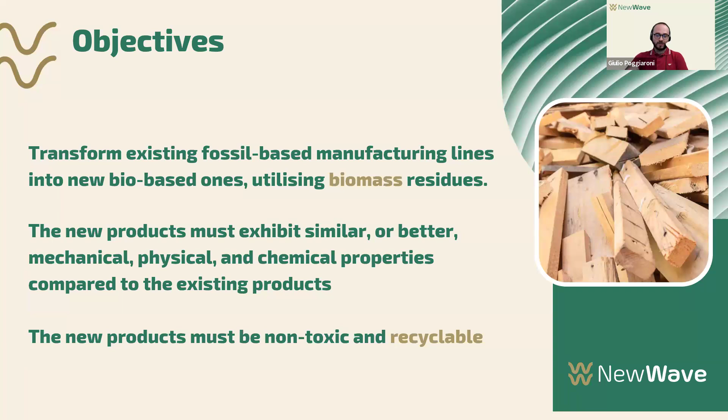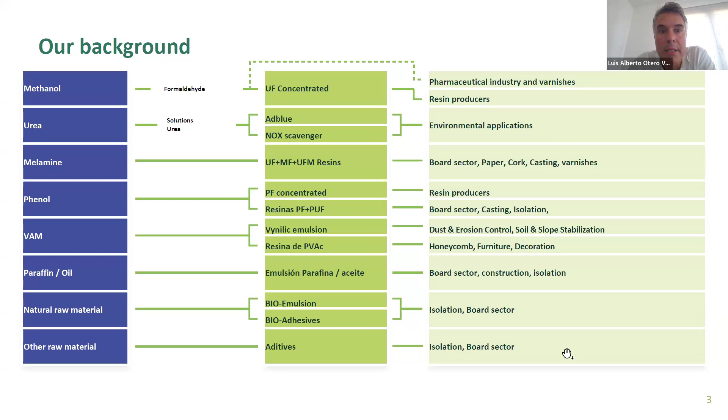Regarding this research on bio-based products, in the last 15 years, as I said before, we carried out several European projects, but also internal projects, from biomass or agro-waste to extract the polyphenolic compounds, lignin and tannins mainly. And when we arrive at a solution or a product, we file the patent and register the trademark name.

In the next part of the presentation, I will explain the technical challenges and the sustainability issues in the engineered wood sector, and we will focus on MDF as an example, but it's quite similar for OSB, particle board, and plywood. Any additional questions after the presentation, we may answer. Okay, next, please.

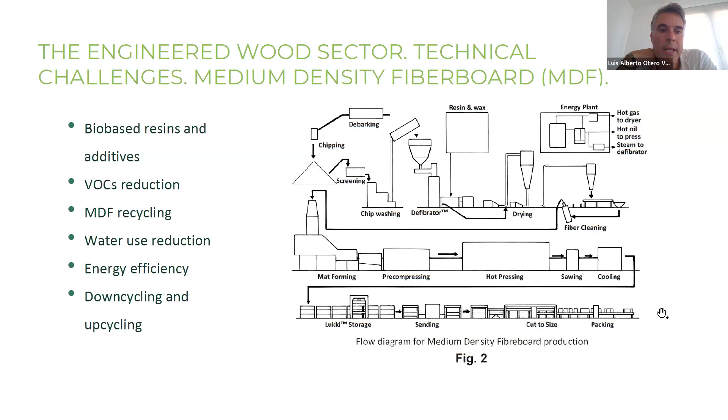Regarding sustainability, the challenges are not different from other sectors. One of the challenges is decarbonization. In FORESA Technologies, over 60% of our projects are dealing with decarbonization and reducing the carbon footprint of our processes and products, and also trying to push forward our raw materials to reduce the carbon footprint. Another topic is water reduction and energy efficiency, as I said before.

Another important thing is to create processes and products safe and sustainable by design. In this case, FORESA Technologies has integrated regulatory affairs in our area. So just before starting a project, REACH issues and sustainability and safety topics are very much in mind. This is important because from the very beginning, we take these issues into account.

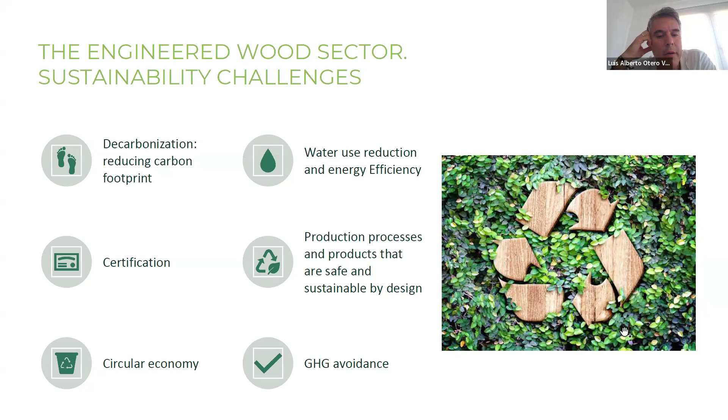Circularity is also important because we need to move from a linear economy to a circular economy, and we have this point in mind in each new project. And of course, the NewWave project also fits perfectly with this topic. And greenhouse gas emissions: we need to avoid or carry out abatement of these gases, for instance CO2, but also other organic molecules. Next, please.

For us, NewWave is absolutely aligned with our goals and objectives. And in this case, our work is focusing on work package 5, and we'll explain a little bit our work in this nice project. Next, please.

Okay, the idea of the project is to use residual biomass to create several streams and to add value to these streams using a fast pyrolysis technology. In this case, FORESA will use the bio oil that comes from this fast pyrolysis, and we will use these fractions in our products and to develop new products to substitute the oil-based raw materials. Okay, next, please.

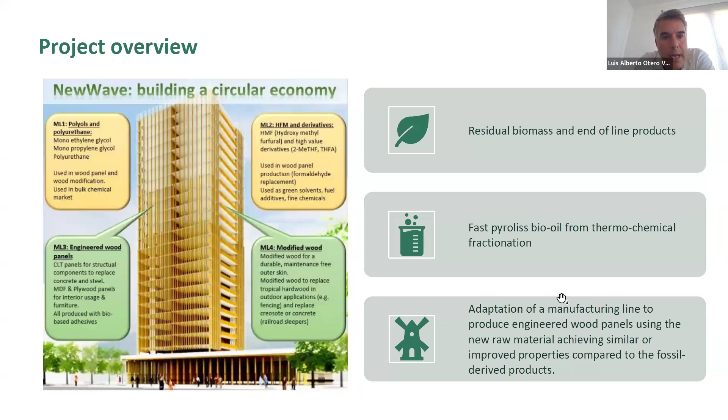In this case, we will use the lignin fraction, several fractions with different characteristics: molecular weight, aspect, pH, and so on. So we will analyze these lignins. We will produce resins different for each application. It's not the same resin for plywood as a resin for MDF. And once we have this resin, we need to adjust the manufacturing of the composite. Plywood is not the same as MDF, and plywood with lignin fraction A is not the same as with lignin fraction B.

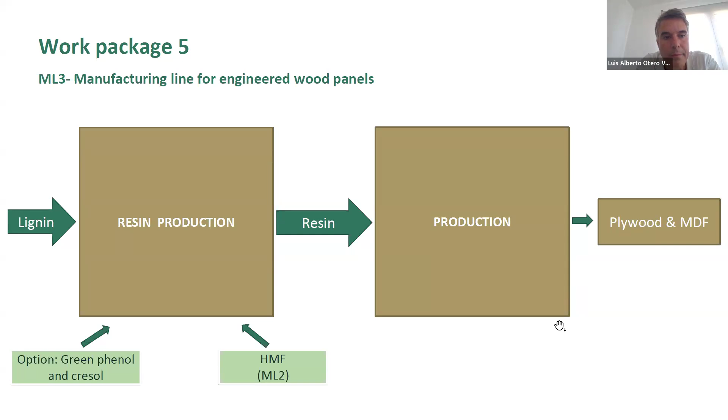Another goal in this project is to obtain a fully bio-based solution using green phenol and cresol obtained by RUG, and also to use hydroxymethyl furfural for a 100% bio-based resin. Because in the case of lignin, we are trying to increase the substitution of fossil phenol by lignin, but we also have a non-bio-based fraction that comes from formaldehyde. So the idea of the fully bio-based solution is to substitute formaldehyde with another bio-based aldehyde, in this case hydroxymethyl furfural. Okay, next, please.

Okay, the duration of the project is 3.5 years. And this is the chronogram with the activities, and the final objective is, as I said before, to produce a 100% bio-based resin. Okay, next, please.

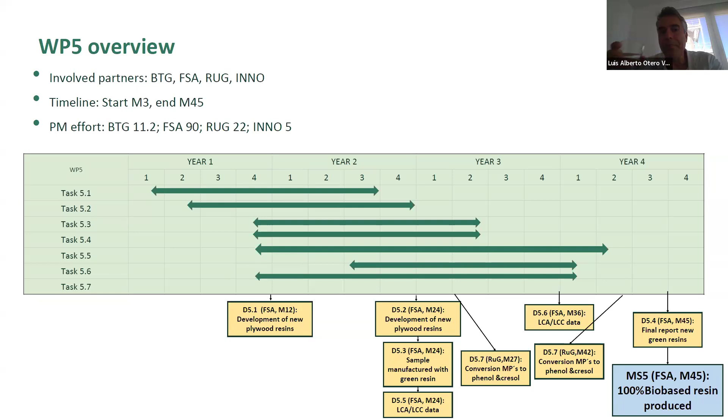The objectives of this work package are to design green panel boards, plywood, and MDF based on this pyrolytic lignin. The idea is to use the highest content of modified lignin as we can. And in a second stage, the idea is to develop a fully bio-based plywood and MDF using this biophenol and biocresol, and also the HMF.

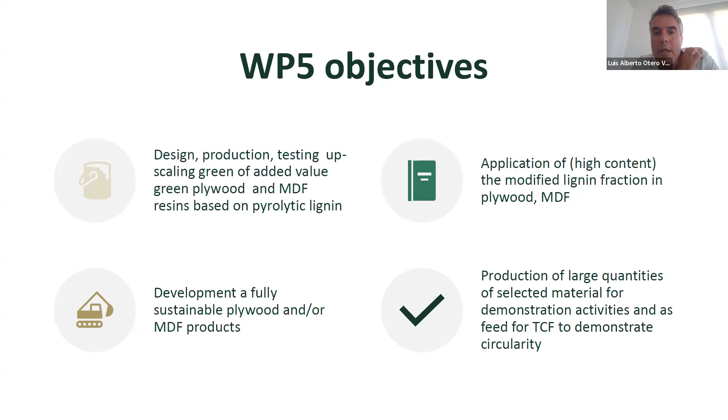And the idea is to produce enough amount to test the possibilities of this technology, to carry out the scale up of these products. Next, please.

So more or less the tasks are: we carry out the characterization of the lignin fractions from BTG. In this case, we analyze the CHNS, the molecular weight, the pH, viscosity if the product is liquid, and physicochemical characterization. The next step is to see the suitability of each lignin to use in phenolic resins to substitute the phenol for lignin, to try to change the amounts or the degree of substitution of this phenol, and also to design new resins to overcome the problems we have when we characterize the resin.

After that, we scale up and we cook these resins in two streams: one resins for plywood and another type of resins for MDF. And finally, once we have the resin, we need to adjust the conditions of the line to produce the panels. The conditions are press temperature, pressure, cycle press, etc.

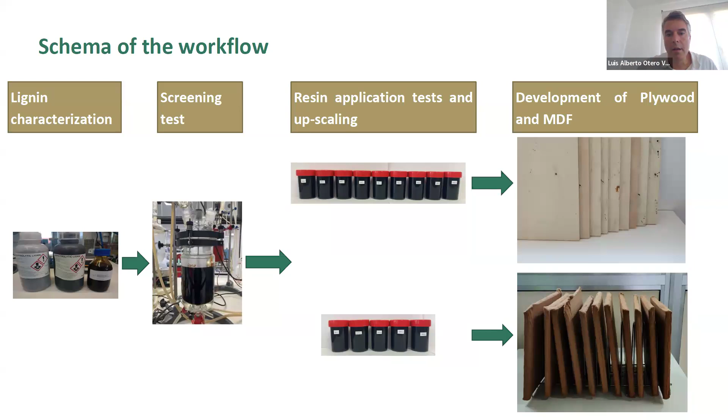Once we have the resins, we analyze them. It's also important, the physicochemical characterization, but one of the main parameters is the reactivity. We measure the hardening time, also the free formaldehyde of the resin, and the free phenol. Additionally, we analyze the molecular weight distribution. In this case, not only the average molecular weight. For us, it's really important to see the graphic, the distribution of the different molecular weights, because it has a relationship with the properties like cold tack, reactivity, and behavior in the process of manufacturing the composite.

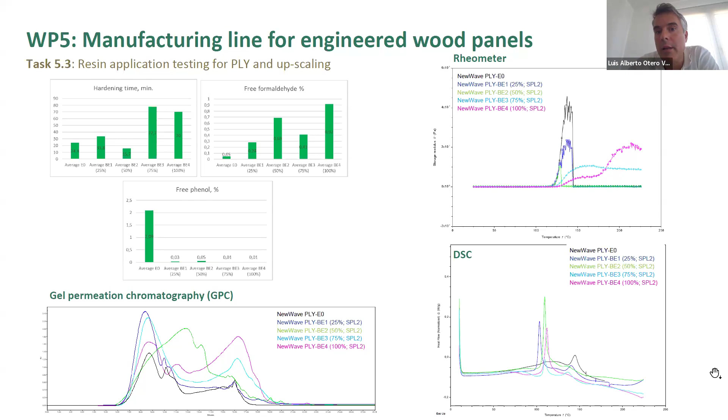It's important also to carry out a rheometer test, that means mechanical curing. We have a rheometer using disposable plate in an oscillatory analysis. We measure the properties of the different resins. And also we analyze the chemical curing using DSC, differential scanning calorimetry. In this case, we measure the enthalpy of the formation of the bonds during the curing, and we measure the temperature of the peak and also the area below the curve. And all these techniques are complementary and they give us a lot of information, really useful for the design of the following experiments. Next, please.

Okay, regarding the manufacturing of plywood, we carry out different degrees of substitution using 25%, 50%, 75%, and 100%. In the case of plywood, we have several qualities depending on the final use. We have class 1 is just for interior use, class 2 for a humid environment, and also class 3 for exterior use.

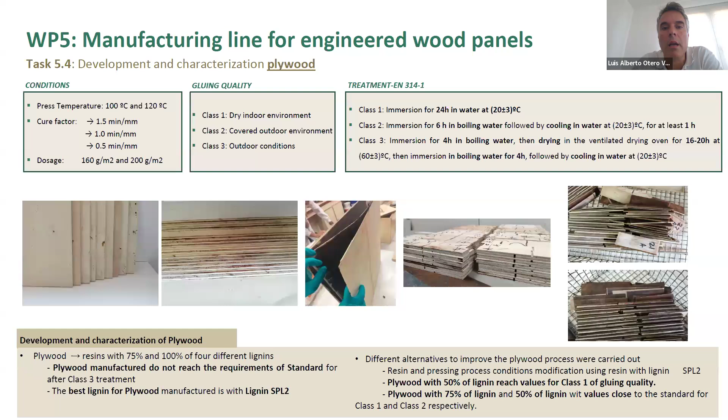We have reached 100% of substitution, and we don't meet the standards for class 3, but it's really important to have 100% of substitution in this panel, because in the market, one company in the north of Europe and FORESA have a 50% of substitution of phenol for lignin. And okay, it's okay, but 100% is really a feat, because even for class 1, it's an important achievement. Next, please.

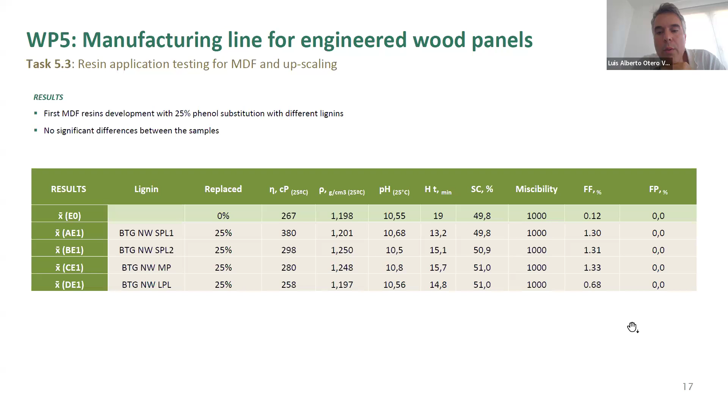Okay, we use different fractions to produce also MDF resins. Up to now, we carry out the substitution of 25% with nice results. Those are the samples with 25% of substitution of phenol for lignin. And right now we are testing 50% and 75% of substitution, and we will show the results in the next NewWave meeting. But the results are quite promising. Okay, next, please.

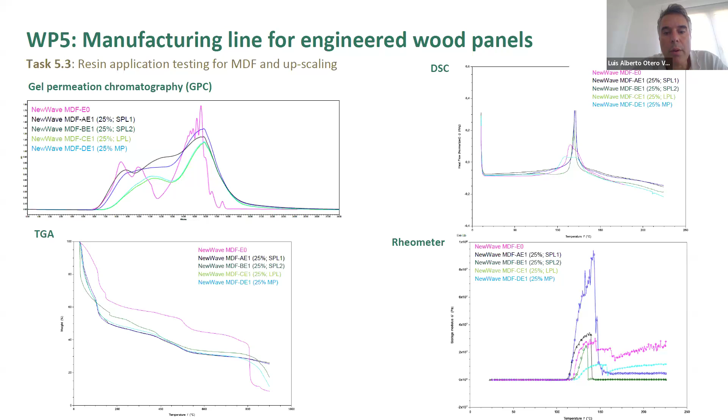Okay, in this case, we also use the same tools to have the information to design and to fine-tune the properties. And in this case, we also use TGA to measure the solid content and the temperature where the products start to degrade. But in the case of DSC, rheometer, and GPC, or size exclusion chromatography, it's the same insights as in the case of plywood resins. Okay, next, please.

In this case, as with plywood, we also have several qualities. We have a standard MDF for interior use, but also moisture-resistant MDF. And in this case, we are testing this MDF. In the very beginning, during the pilot plant manufacturing,

Okay, in our understanding, our take-home message is that we are learning in this project there is a lot of room to improve our materials, and the challenge is to increase the degree of substitution of fossil-based raw materials with bio-based ones. We are on this path, and we have a lot of commitment in the process and a lot of expectations.

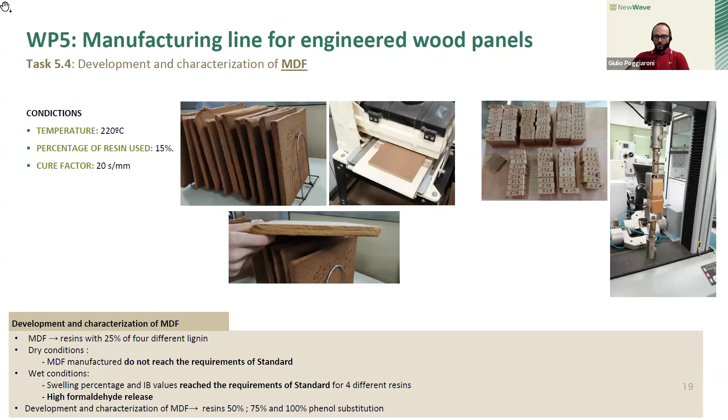Thank you. Moving to the questions, I see that some are more related to the production of the fast pyrolysis bio-oil. This part of the project is led by BTG, Biomass Technology Group from the Netherlands. So we'll go through some of the questions, and Luis, tell me if those are pertinent to your activity, or if we will redirect our attendees to another time for replying.

What has been your experience with managing VOCs, such as furan derivatives, that are inherently present when using HMF-based resins? What solutions have you implemented to address these emissions? Okay, we have been focusing for several years on decreasing formaldehyde. Formaldehyde is also a VOC. And right now, we are at quite a low level of exposure.

But VOCs sometimes means naturally occurring compounds in wood. In pine, for instance, you have limonene, terpenes, and so on. So the challenge is to try to reduce these products. The idea is to decrease chemicals, for instance formaldehyde and also HMF. We have no experience with the levels of HMF VOCs, but probably in the last part of the project we will have some information about that.